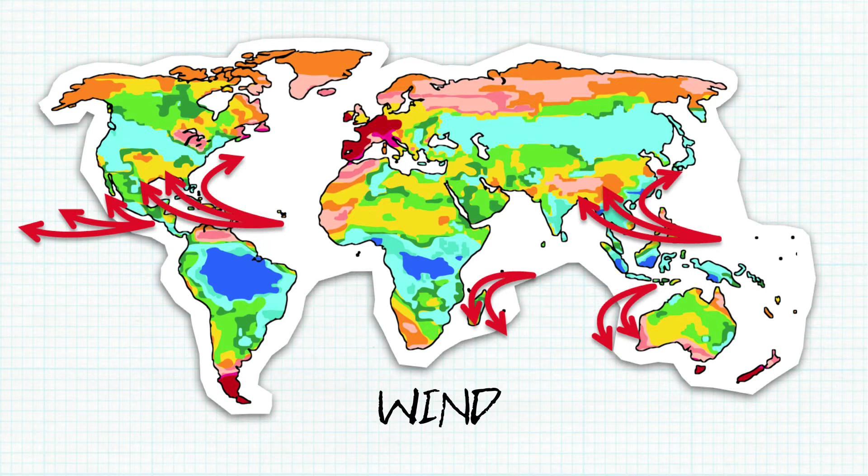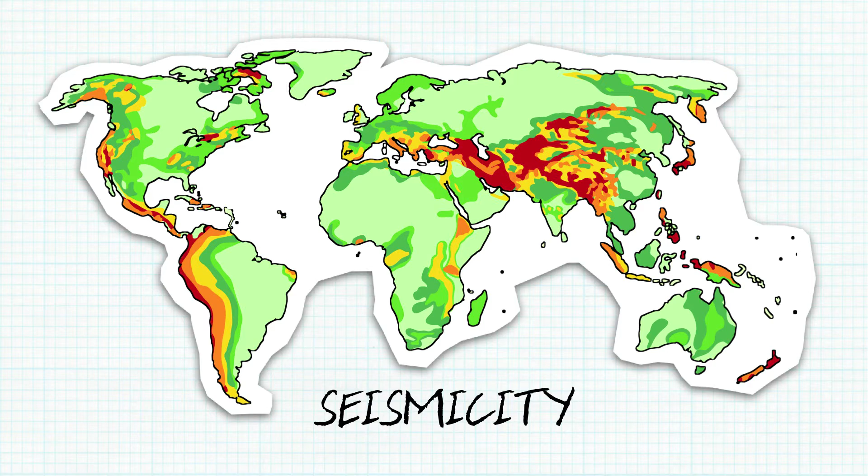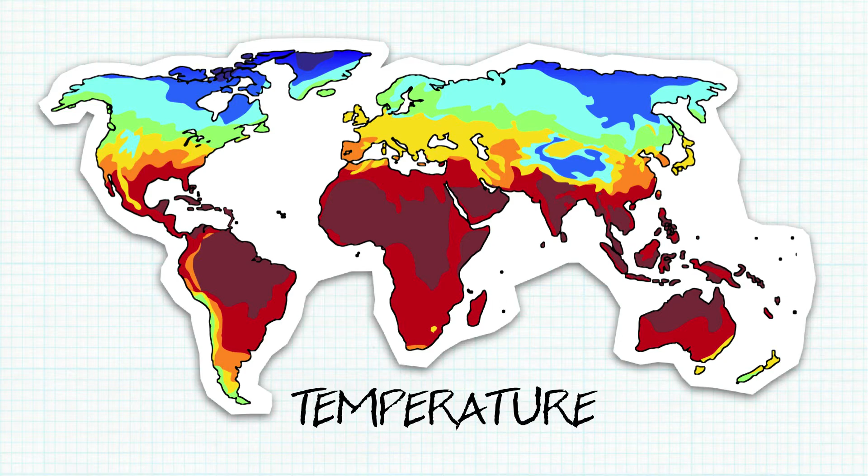So the long-standing American template would have to be questioned, because it doesn't transfer easily into those climates and geographies. When you actually look at the number of variables, the template that you've got to work with is actually quite limited. The real skill is how you put this limited palette of technology together. Facades, elevators, and sustainability certainly travel internationally, but the foundation structures, some of the fire escape strategies, and materials are definitely locally based.

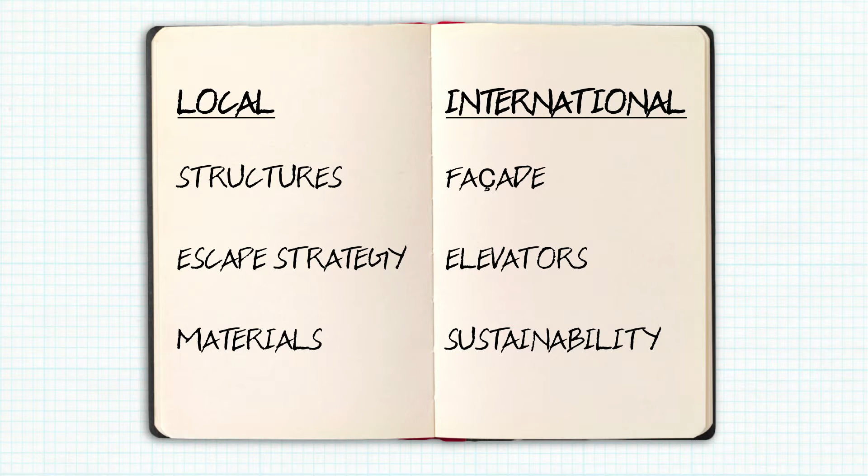So the way that you put those things together—loosely termed how, being technology, and where, being geography—in many ways defines what it is that you will build. You can extend this beyond tall buildings, I would suggest. So what I would like to do is, by reviewing two or three jobs that we've either completed or are under design, describe a little bit how they work and the influence of the geography and the climate, among other things, and the effect that local technology has had.

What you see there are the conceptual models for Renzo Piano's landmark tower in Seoul. It was 620 meters high, very susceptible to aerodynamics, and the top of the building was very important. By sculpting the top of the building, you could halve the forces—effectively the overturning moment—that you got at the base. So we studied a whole plethora of shapes. It was really the big brother of the Shard. The way that we organised the core was critical to the net-to-gross ratio.

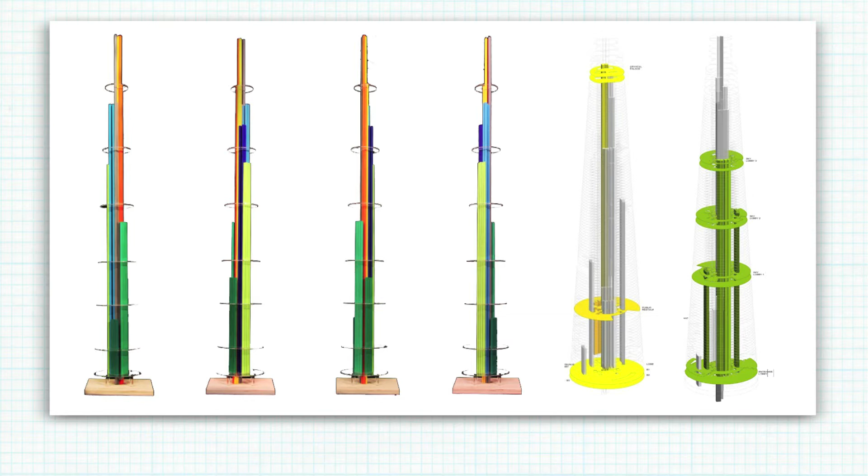In a holistic sense, what we first did was decide on an elevator strategy, strangely enough, and the structure would follow. We stacked elevators, we used sky lobbies, and altogether we achieved a core. The area of the core dedicated to elevators was half of the core that we used at Canada Square in Canary Wharf, and that was for a population of 14,000 people on a building of 620 metres.

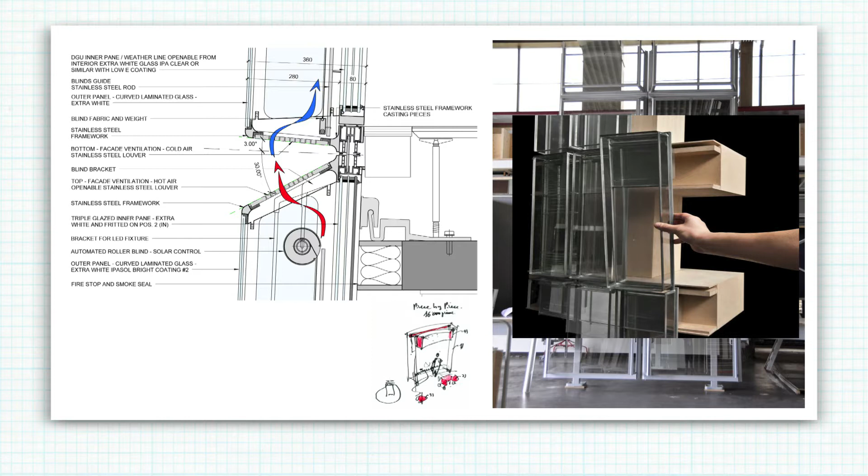A very significant move. We then made sure that the facade worked—the facade being probably the biggest influence on the energy consumption and the demand on the HVAC systems. We wanted to maintain daylight, so we had an adaptive facade, but basically when the sun wasn't shining on the facade, it exposed the interior to daylight. We used a ventilated facade, and we gave the facade a high thermal performance. So the two key drivers to start with were the elevators and the facades, a recurring theme, I would suggest.

The next major step forward was, for those of you that have either worked on or understood tall buildings, the next natural thing to reach for was an outrigger scheme—basically the ski poles that you would hold on to stabilize yourself when skiing. The outriggers form exactly the same solution. They are the arms. And you can see here the intense stress concentrations that occur at the outrigger positions.

We chose to question that, and we chose to question it for two reasons. One, the outriggers can drive the size of the core—we didn't want that to be the case. We wanted to smooth out the stress concentrations over the whole area.

Essentially what we created was, on the outer skin, a double helix. That double helix connected into the floors, and it shared the forces—stability forces—between the core and the external skin. What that meant was that every single piece of the building was contributing in all cases: wind, seismic, and vertical. There was no wastage there.

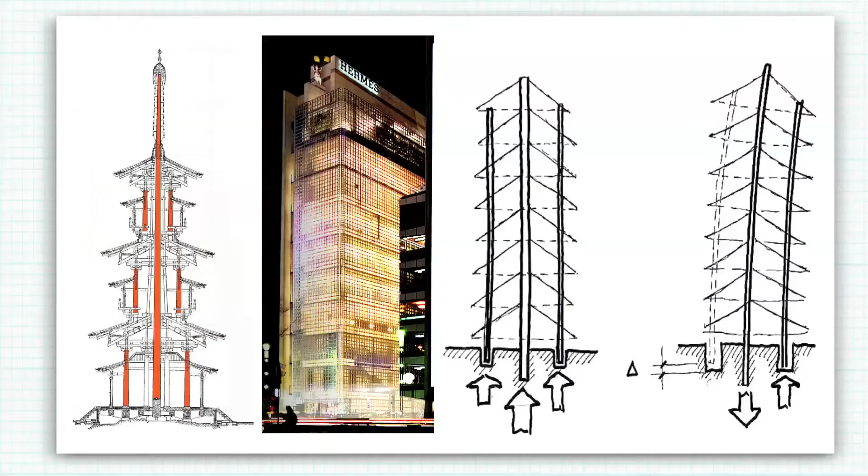When we put the three major elements together, we created what we believe is a unique concept, because we get a relatively uninterrupted facade, a minimized core, and every single piece of the structure contributing, which helps in damping. That was really a stiffness, wind-driven structure.

15 years before, we were working in Tokyo with Renzo Piano again on the Hermes Tower. We had a very small site, 10 by 50 meters, probably the most expensive site in the world. We needed to maximize the net to gross, so we visited indigenous technology and looked at the pagoda, because there was a history of this type of structure surviving severe earthquakes.

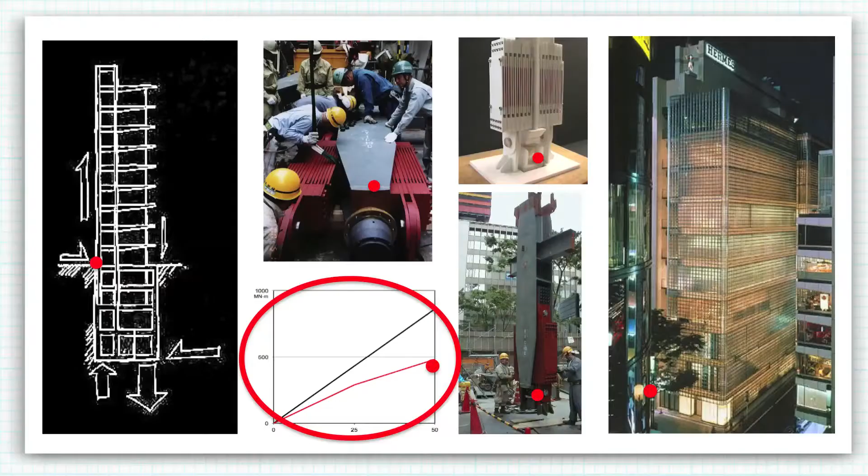It survives because one of the columns lifts, as you can see on the diagram on the right. In lifting, it reduces its stiffness and limits the amount of energy drawn out of the earthquake event into the structure. We thought that was a good idea, because if we could limit the force or energy absorbed from the ground, we could minimize element sizes and increase the net to gross and land usage on this very expensive site.

So we decided to adopt a stepping column. On the sketch on the left, we severed the column so that in an earthquake it lifted. The real point of this story is that we effectively halved the overturning moment the building experienced in an earthquake. That meant the front column was only 6 inches in diameter, while the back column was 1 meter 20 square. It was effectively an outrigger scheme, and it enabled Piano and his team to really liberate the space in the building.

Behind both of those jobs, in essence, was the spirit of collaboration. When we moved to Mexico, we wanted to take the knowledge gained in Tokyo and test if there was opportunity to extend this thinking. There was, because as well as having a benign climate, which set an agenda for the building in Mexico—incidentally a Richard Rogers Stirk Harbour design, with Arup—we had very soft ground.

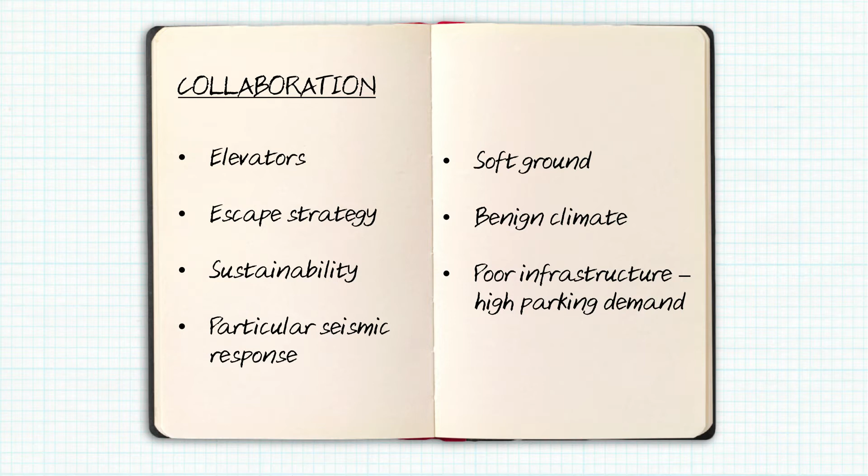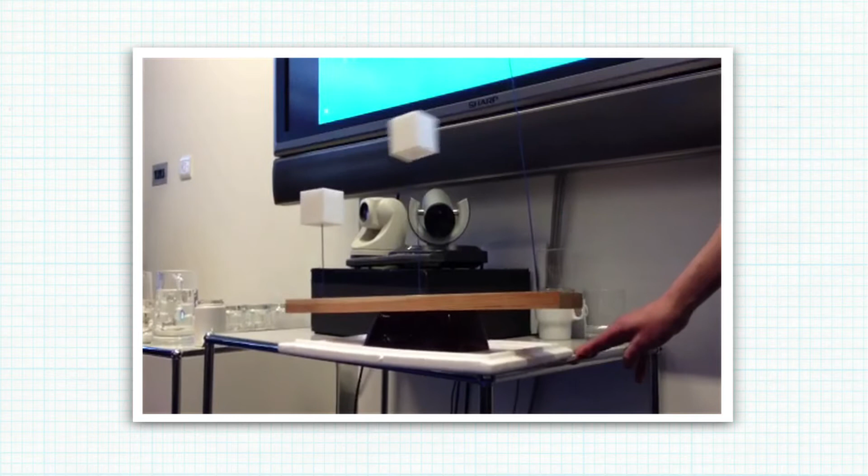When we tried to explain this to people, it's quite difficult, so we built a model. Will Alsop made the jelly, I made the piece of wood and things, and Tom Wilcock filmed. Effectively what you see is me rocking the table ever so slightly. That small movement is amplified through the jelly, and the frequency of the jelly and the frequency of the mass on top are such that you get an amplified resonance.

What's really happening in Mexico City is that the earthquake comes through the rock, then meets a soft bowl of material. That activity is amplified and is very close to the frequency of the building above, and that's quite dangerous.

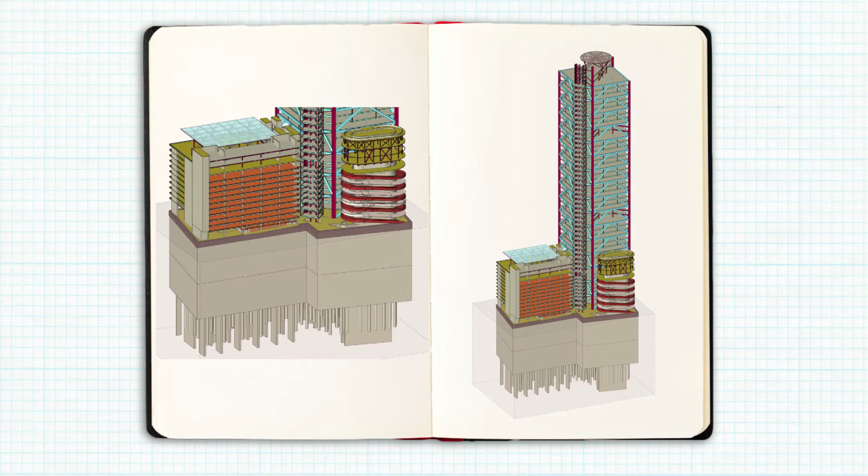Added to that, perhaps the biggest influence on the design of the building was the lack of infrastructure, a recurring theme. We needed to find space for 2,800 cars on this compressed city site, so we created a basement of 7 stories. That, along with the influence of earthquakes, and the lack of infrastructure, forced us into a certain design direction.

Because the climate was so benign, we had the opportunity to really think through the facade, and what we chose to do was put a veil down the outside of the building, which shaded us from direct sunlight but gave access to the outside. Each of the 4 sides of the building were ever so slightly different, because the angle of the sun was different.

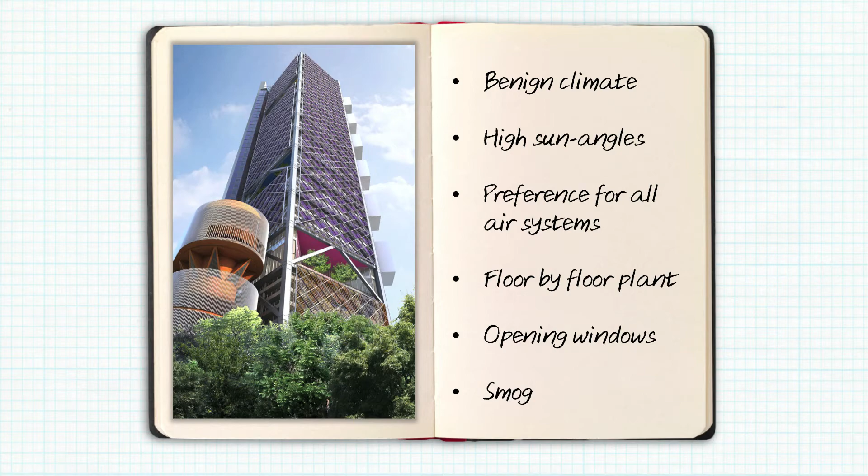We explored opening windows, which is kind of at its limit at 50 stories, and rejected it. We had very poor fresh air—smog in Mexico—and very high sun angles, which meant the shading of high-angle sun was absolutely significant.

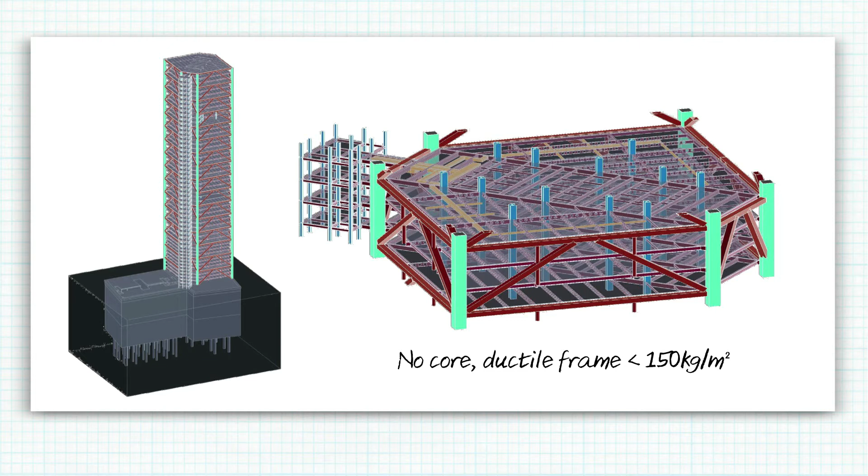But the major difference, and part of the reason for discussing this project, is that it's the total antithesis of what we did in Seoul. We wanted a light, ductile building, and we achieved that with a very competitive steel weight of less than 150 kgs a square metre, which those of you involved in tall buildings will recognize as very competitive in terms of steel quantity.

We avoided a core. A core can weigh anywhere between 20 and 50,000 tonnes, and when you have to support that on poor ground, it really is an issue. To avoid that is a real benefit, because once you set that core moving, you build up huge stresses and forces inside the building, so there's a real advantage in a ductile frame.

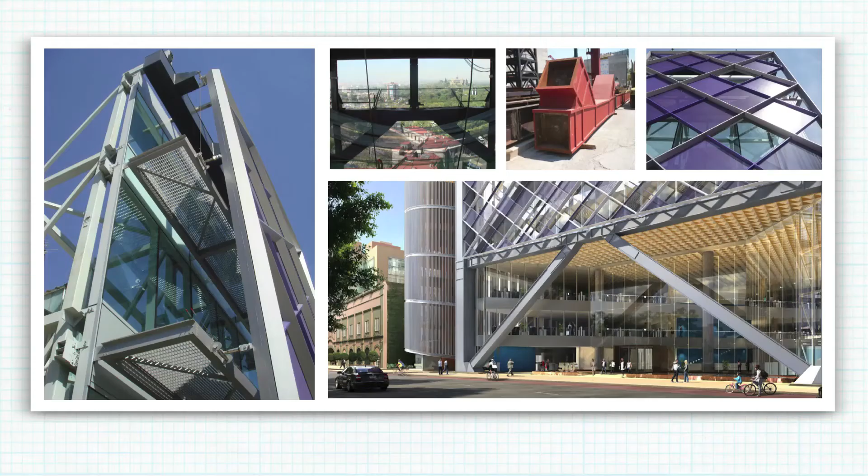You can see here some of the mock-ups of the facade. It's a deep facade that sat in front of the ductile frame, giving access for cleaning and shading. It was also hung over 3 stories, so that the complex facade could move with the earthquake in an extreme event without damage.

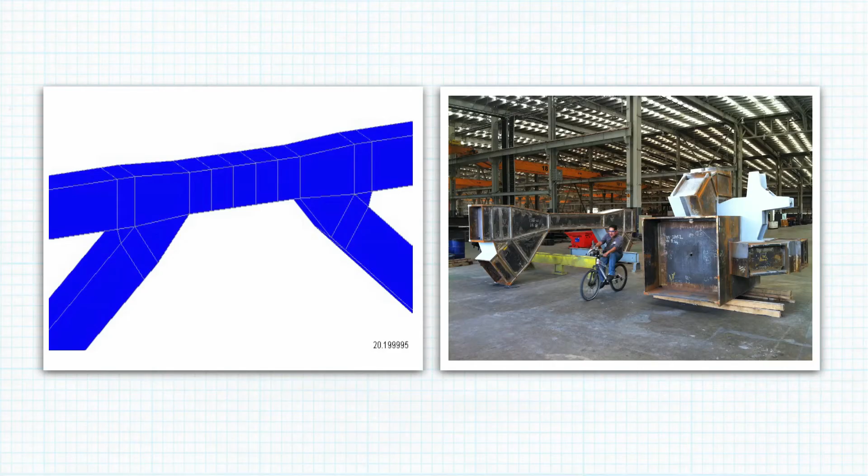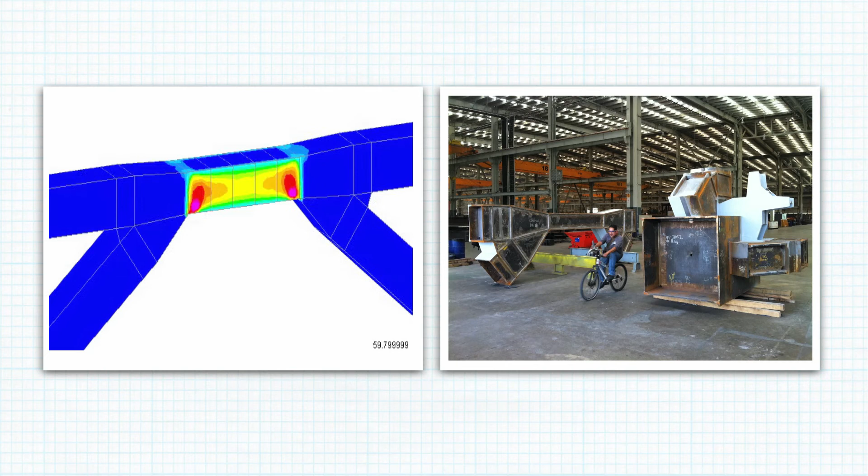But the real key to the job was, in the same way we developed the damper in Tokyo, we developed a seismic fuse, an EBF, eccentric braced frame, which reduced the overturning forces to a manageable quantum. That was the real breakthrough for us. What you see here is the time history, showing how this structure would react over time with the input of an earthquake and the forces it generates.

Having said that, we extended our thinking. What would happen if we took Tokyo, Seoul, Mexico, each with their own specific geography, climate, and infrastructure, and took some of our more famous jobs and moved them around the world? You'll be familiar with the Gherkin, you'll be familiar with Leadenhall.

The BBVA Tower went to London, and we decided to shift IFC to Tierra del Fuego. Not bad. I'm not sure it would go too well there, it'd probably sink the place.

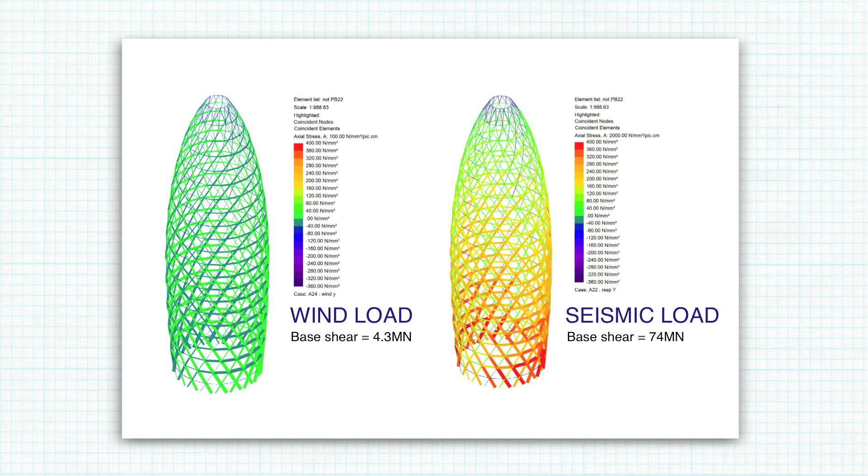And therein lies a story, because in moving the Gherkin, or Swiss Re, to Mexico, applying the earthquake forces, the pushing force at the bottom went from 4 units to 74 units. So the very thing that made Swiss Re such an elegant design for London was, in many ways, totally useless in Mexico.

So those of you who are architects here, looking to develop buildings, it's really worth visiting your local engineer and having a discussion on form before you decide what to do.

Sometimes you can reduce that 74 to about 10 at an absolute limit. There's absolutely no way with that current form that you will get from 74 down to 4.

The great thing about Swiss Re is you get the wind for free. So once you've designed the building for its own weight, the overturning forces and forces in the system really are quite insignificant. Dominic Monroe and others deserve great credit for the work they've done there.

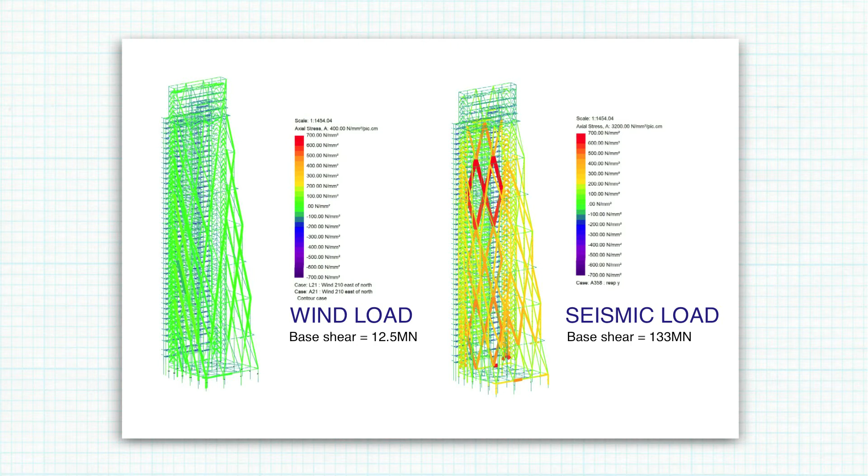Our next friend: we packed our bags and took Leadenhall and dropped that in Mexico also. A slightly different story here. We got the pushing force at the bottom in London at 12 units. When we took it to Mexico, we got 133 units of force. Not bad. That's not bad. Manageable. You could bring that down.

But the really interesting thing was that the asymmetry of the form, where the mass and stiffness change due to its triangular shape, meant that the forces right at the top were almost the same as at the bottom. The reason is that it's vibrating in a different way. It's the top that suffers as it sucks the earthquake energy out of the ground, effectively accelerating the top to a point where the stresses at the top are about the same as at the bottom.

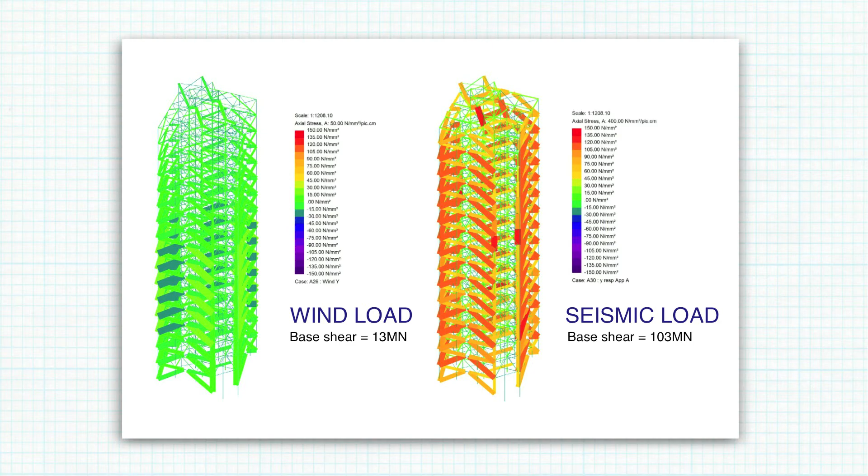So, undefeated, we tested ourselves on our Mexico design and asked what effect that had on the Gherkin. What really, if you compare like for like, would happen on the BBVA project? What we found was that we got a base shear, a pushing force at the bottom, of 13, and a sliding force under earthquakes of 100. Again, that's not bad. I can do the math, about 8 times amplification.

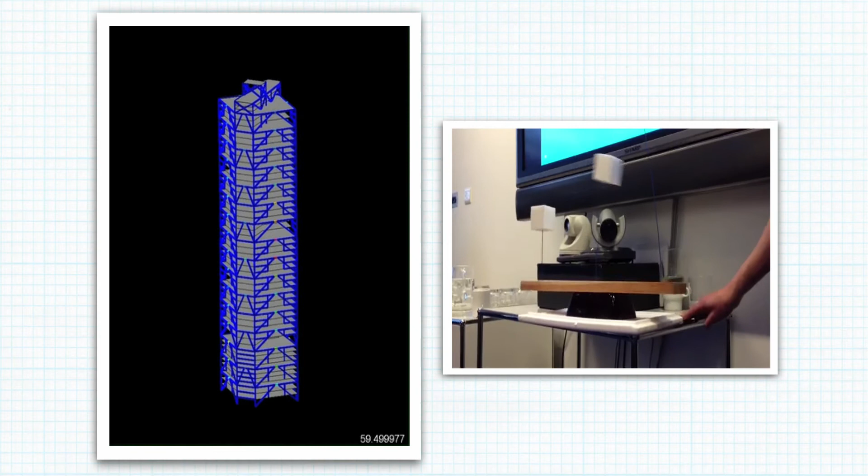But the great thing was that because of the way the building was conceived, when an earthquake came on the right, we'd see a small push amplified through the jelly, through the soft ground, exciting the structure above. What we were able to do was concentrate the failure into very discrete areas that over time could be replaced. That really took the forces down to manageable sizes.

We had to challenge the American code in doing this. We actually brought the draft of the American code forward to meet expectation. They were there when we applied the code as it stood, we would have had real problems. But along with our colleagues at SOM, Neville and Bill Baker, we formed a small party and challenged the code, bringing the draft forward and actually using it to justify our design.

However, the real interest here is that we took earthquake signals, real signals that were measured data, and using software that Arup developed as part of crash technology, called Dyna, we were able to model in virtual time the effect of the earthquake. And what you actually see is quite significant, because you don't get this action.

It's all based on the snaking effect or the vibration effect. Because of that, the force is reduced considerably.

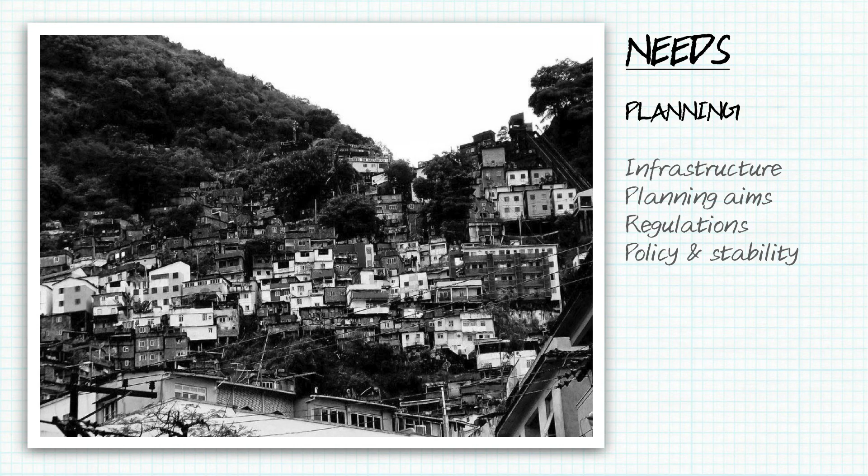For that, I really believe our government and planning authorities have got to get their act together and support initiatives in a positive way. Finally, I think the emerging economies haven't got long to get their planning right, but they need to. That really means getting their regulations and standards up to international standards, getting adequate infrastructure so we don't have to build 2,800 car parking spaces under BBVA Bancomer, and really giving some stability to planning policy so that people can begin to invest with confidence.

And if I go back to the beginning and say, my initial analysis of where, what and how, I can see definitely South America, India and Asia developing. I think energy conservation and sustainability has to be at the heart of what they do. They've got time to get that right. And to our designers, really find appropriate technology to suit those emerging economies. Thank you.

I thought the talk this morning was really, really fascinating. I think the whole subject of tall buildings and how far mankind can go in terms of building structures of that kind. Having recently been to Dubai and seeing that most extraordinary tallest building in the world, and wondering how on earth it can stand up, I think with Bob's talk I've got a better idea today. I thought it was very interesting.

We're a very small firm, and the opportunity to discuss large buildings in our small office isn't often there. But it's very interesting to see the breadth and range of expertise which is applied within Arup, obviously, on such interesting buildings. It's fantastic. Bob was engaging and actually very exciting.